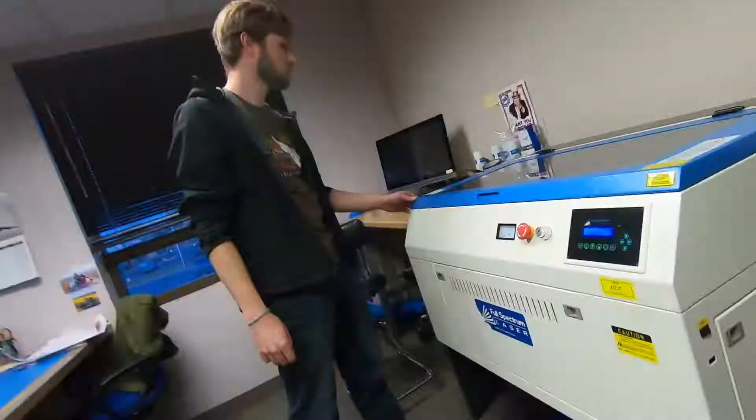Oh, is this the laser? Yep. So sweet. Most of its life is cutting foam for packaging stuff, but it also marks parts, cuts acrylic, marks metal. We can use it to engrave wood for personal projects.

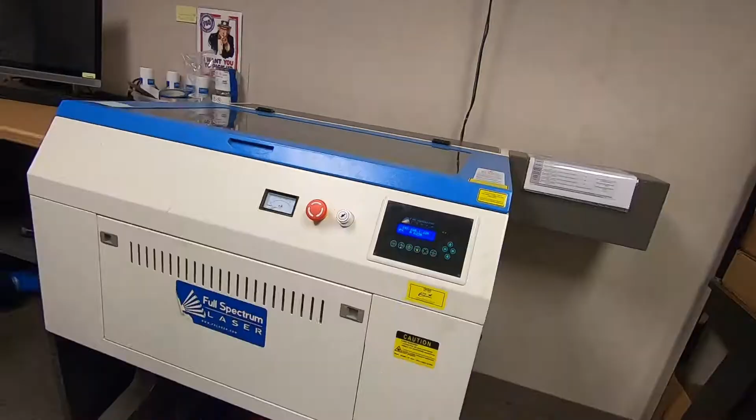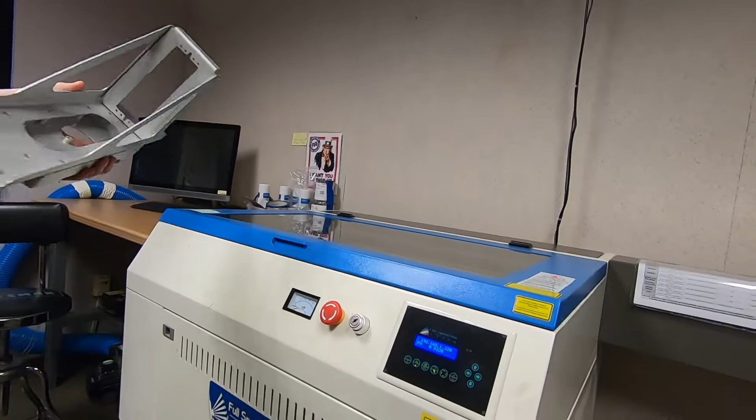So here's a mounting tray. This would hold a computer inside of an airplane, and so we laser the part number and stuff onto the side of the tray. Oh, I see. So use it for engraving too. And so like a product like this we make here from scratch. We start off with just sheet metal and go through the whole process and turn it into a part. So cool.

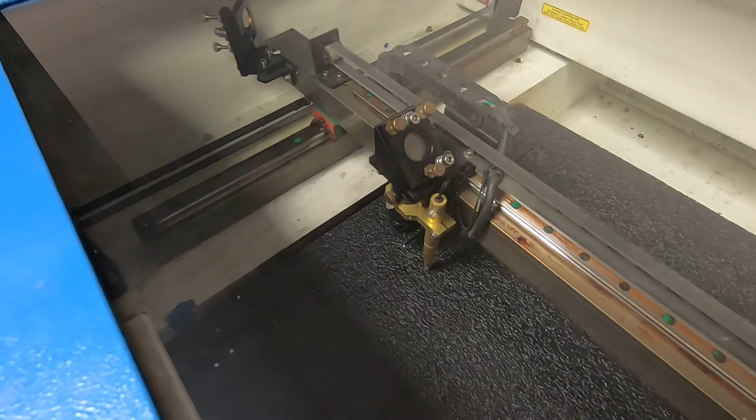Oh, it's exhausting into the room. Yeah, I was gonna say it's not even really making much smoke. Even bigger than that, yeah.

How many pins were those again? 66. 66, wow. I work with 4-pin connectors on PCBs. Oh, these are actually bigger pins, so less. Bigger pins, heavier gauge. So we do all that here.

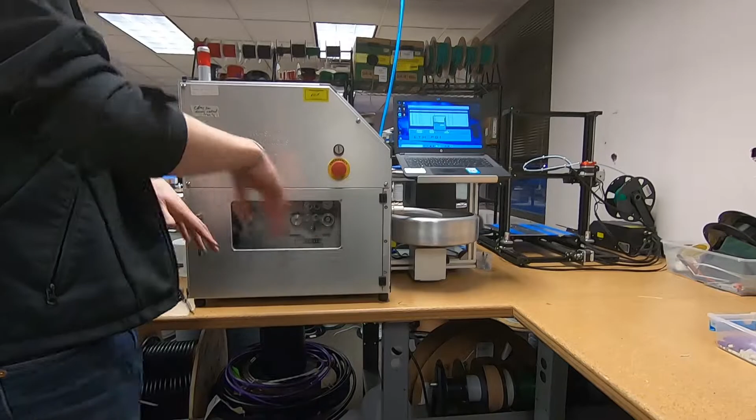So all the wires, before they go into here, you run through a laser wire marker, which marks them all. So we have all the different spools of wire, puts labels on them so you know which wire is which, and then they all go into here, get pinned up, crimped, shielded. There's shields on them, so they're all shielded wires. Yeah, so there's no EMI.

Oh, it's shielded for EMI. So you don't have to put any chokes on them or anything like that. Yep, no RF chokes or anything. And then the shields terminate and go to the base of the body of the connector. Ah, so when the body of the connector screws on, it grounds it, and that way your wires are protected throughout the whole run. Wow, no EMI. What an operation, dude, huh?

Yeah, and so some of this cable costs like $20, $30 per foot. Optimally, this is my desk. There's another rack. Yep, so this is another R&D rack. So these are like the panels we make from scratch. Is this guy? Beautiful work, all the circuit board and the soldering and everything in there.

So we put together the kits for the customer. This is for a very simple system. There's only a couple parts in this kit, but it has, these are antennas that they need. These are Wi-Fi antennas. This is a 3G, 4G antenna. This is an adapter plate for one of the boxes that goes in there. Some pigtails to break out difficult connectors into easier connectors. And then some other stuff that they're going to need for the install. Like I said, this is one of the simplest kits we sell.

Get this kit, nice job. I remember making kits. But it shows up all the stuff they need, all the components. They can just go off, take the foam out, go to the airplane, and have all the parts.

This is our little fabrication shop. This is where we actually make stuff, and it's kind of in process right now. We're doing a lot of rearranging, so there's stuff everywhere. But we have a little manual bender, metal brake, a metal shear, roller back there, paints and stuff, paint booth. The old one is out in the hangar.

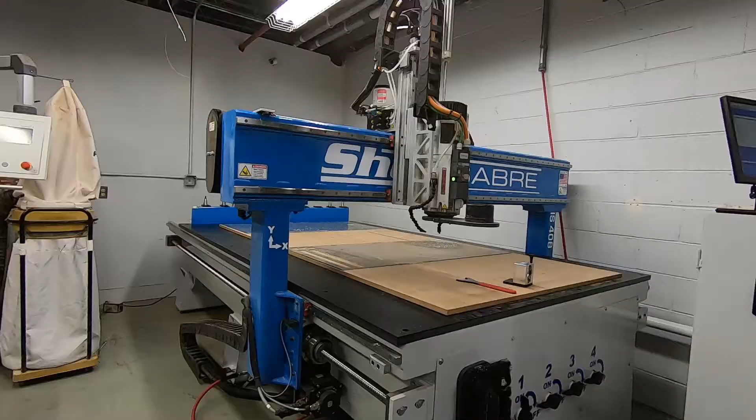This is what we use. We just got this machine like a week ago, and we're still trying to figure out everything about it. But the machine it's replacing, we'll show you out there is a tiny little plywood router, and it's not designed to cut metal, but we've been using it to cut metal for like 4 years. Yeah, and so this machine, which is designed for the purpose, is really, really cool.

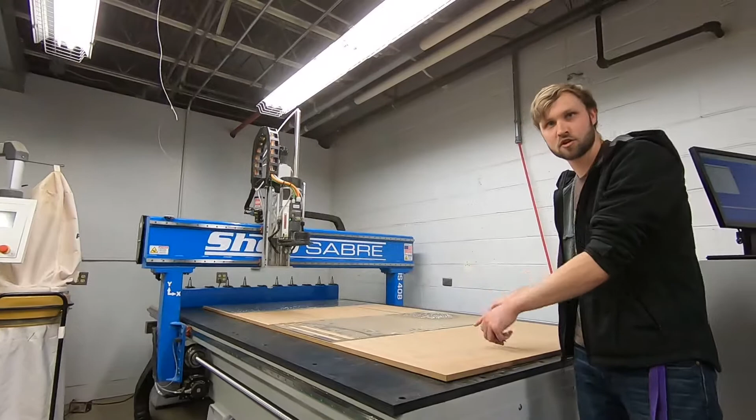Throw the vacuum on it. So before it gets too loud, this table has a big plenum on it. Yeah, there's a bunch of holes in the bottom, and you put this piece of wood on top. It's MDF, and the vacuum actually sucks air through the MDF. So you put your piece of metal on top, and it suctions the metal to the top of the wood just by sucking air through the wood.

Wow, you cannot move the piece. Solid. So when you put your hand on top of that, you can actually feel it sucking your hand. Wow, yeah, that's how strong the suction is. So I think the suction, go ahead and try and slide this metal around. Easy, right? Yeah, so keep trying. Oh, dude.

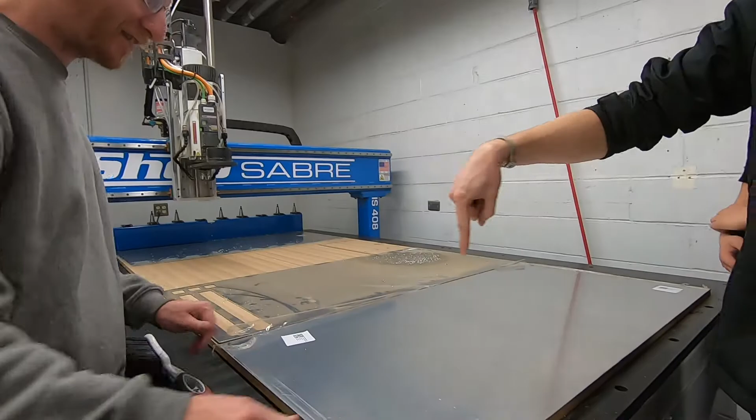You can lift it up, but you can't push it side to side. When it's cutting, that's what it's doing. Yeah, it's holding it steady. So it's really cool, it's as easy as just flipping a lever to lock everything down. No clamps or anything. Nope, exactly. Yeah, it's cool, hands free.

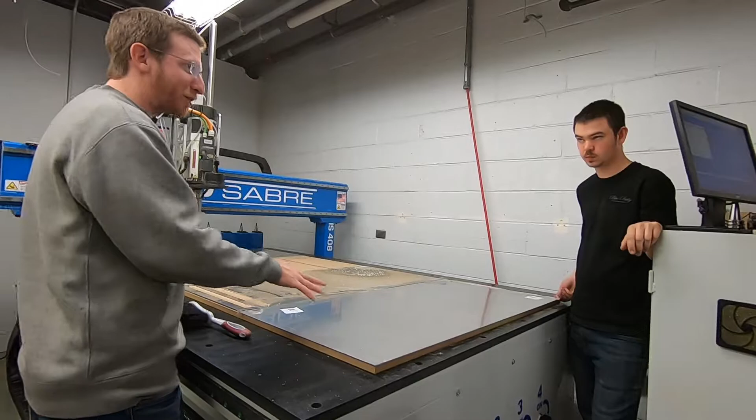So if you think about it, it's really the atmosphere doing all the work. Yeah, all you're doing on one side is creating less pressure. It's really the pressure on top that's pushing it down. So T0 pulls up nothing? T0 enter? T0 enter. Yeah.

That's the vacuum motor down there that actually sucks with the table. It's definitely a bit of a beast.

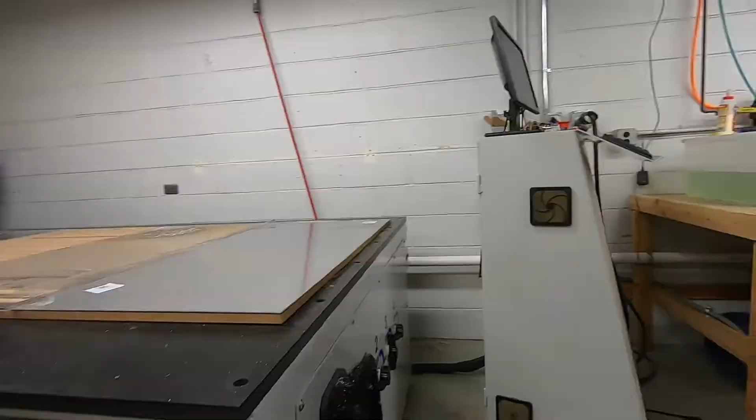G650. 1, 2, 3. Feeling so fly like a G6. Remember that from 10 years ago? 15 years ago? That's a G6.

What year? New, don't touch it. It still is, or may not still be, the most expensive private jet you can buy. For a couple years, yeah. Really? It's like $65 million.

65 million. Look at that leading edge, it looks huge. Oh my God, okay, well, look at a 747. Dude, that is completely ridiculous. Yeah, isn't it? I think it's a beautiful airplane, a beautiful piece of work there.

What's the speed on that? Don't know, it's fast, 700 miles an hour. They usually cap out at like Mach 0.9 or something. Insane. Yep, the range on this airplane is 7,000 miles. 7,000 mile range, holy smokes.

We kind of operate it, we do all the maintenance on it, an airplane, and we'll fly it no matter what. It's owned by a company that does marine salvage. So like when a cruise ship or a barge or a big ship goes down in the ocean, they're the company that gets called to go salvage the ship or cut it up, whatever. It's a function of a couple different variables, like what you're looking to do.

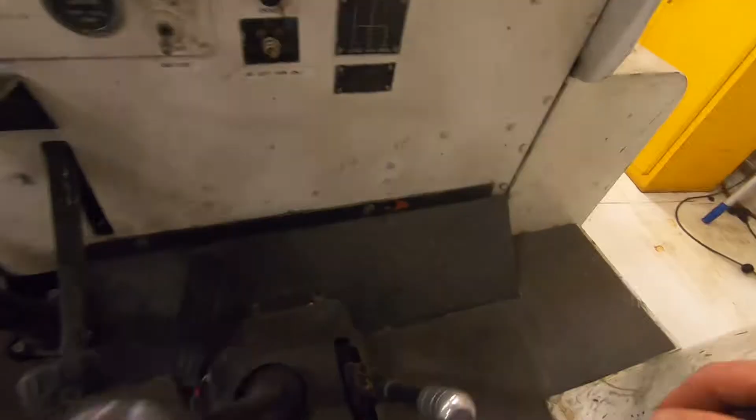That's a World War II tug? Yep, gas V8. That's awesome, all torque. But it's designed to be heavy and have traction, so you can push something that weighs a lot. Fun to drive. Yeah, I've seen these back in the day - they're nothing new, but it's a nice machine. Helps cut metal fast.

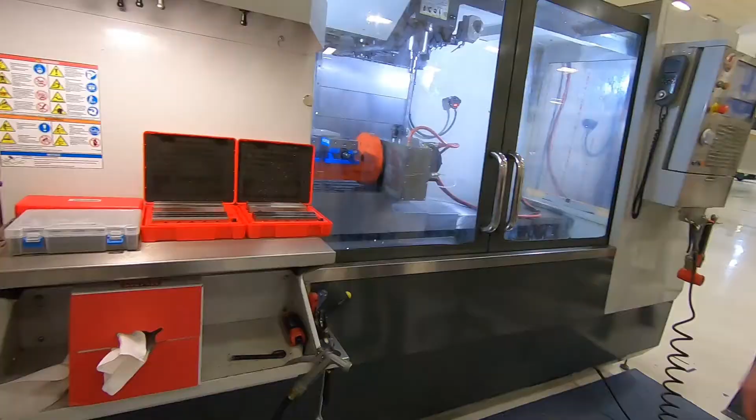This is the fun one. Well, they're both fun, but this is a really cool one. So this is like the newest addition, huh? So there's tools kept up there.

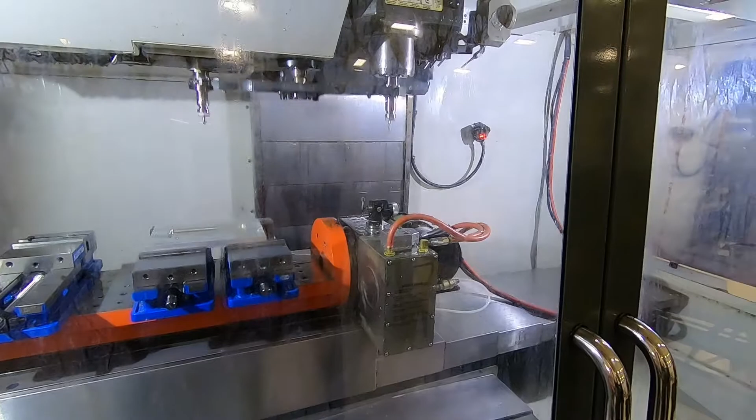Like a transformer, right? Freaking crazy. And then bring the table towards you guys.

So on the other machine, the head moves around and cuts stuff. On this one, the table with your part moves around, and the head just kind of goes up and down. Oh yeah, you got more mass. Yeah, you get more mass and more rigidity too.

This machine weighs what, 19,000 pounds. It's basically like there's a whole spine to the machine that keeps everything rigid, and it's cast iron, about 2 feet by 2 feet. If you look underneath there, the whole base and up around is cast. It's massive. So this table is your limiting size, and we have this orange thing on here.

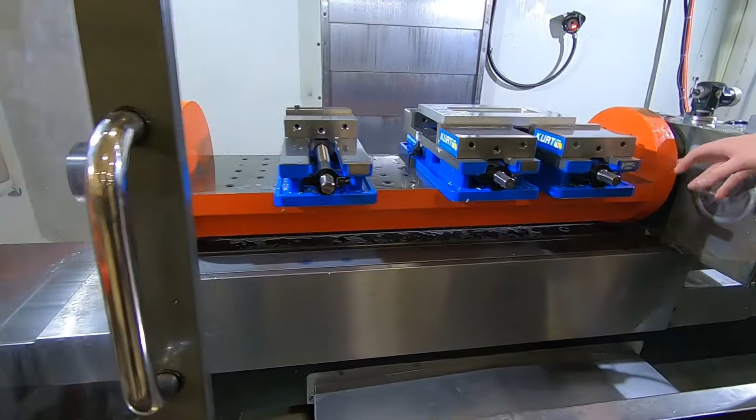This other motor is a 4th axis, so it can tilt. That's a brake, an air brake. So you can tilt it, and you can rip angles on it - crazy stuff, you can do more complex milling.

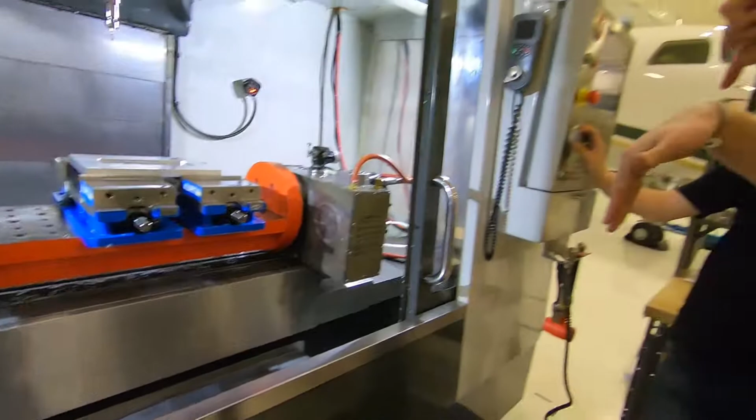So you have your 3 axis - your 2 axis XY movement, your Z for your head, and then you also have A axis, which is twisting. You can then add B axis, which would be like rotating too, and then you can have full 5 axis. You can reach 5 out of 6 sides of a part that way, which is insane.

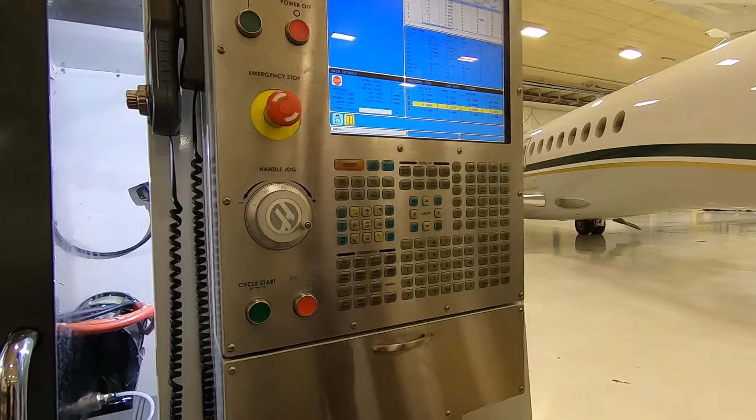And everything's up there on the screen, huh? Yep, so that's how you control it. We write the code on a computer for a part. So engineering will design a part, and then you write the code for it on a computer, come out here with a USB stick, stick it in, and then there's some machinist operations that you have to do, and you can cut the part. That's so cool, dude.

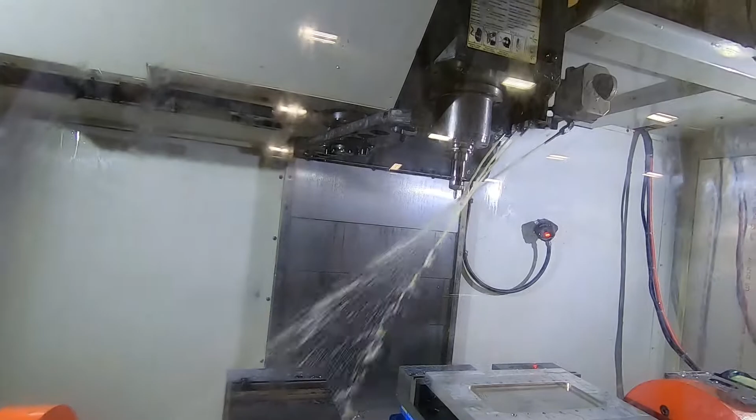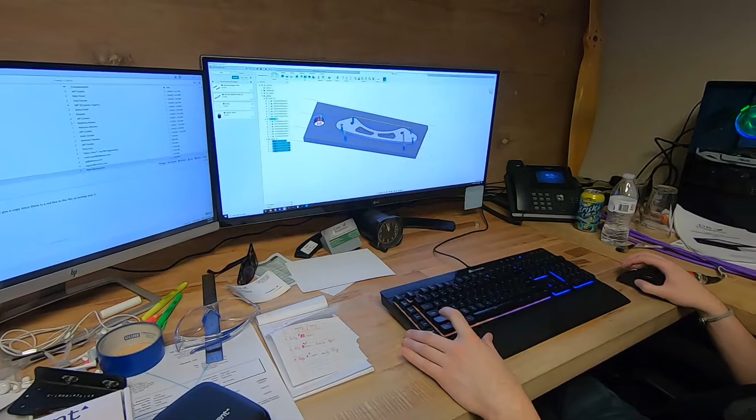Yep, so there's your part - there's a 3D model of what we wanted to make. And you design the fixture for it, so this is that metal plate out there that we just put in the machine. So you design that and you tell it where it is, and here's the code that we made to make the plate there. And then you write the code to actually cut the part out.

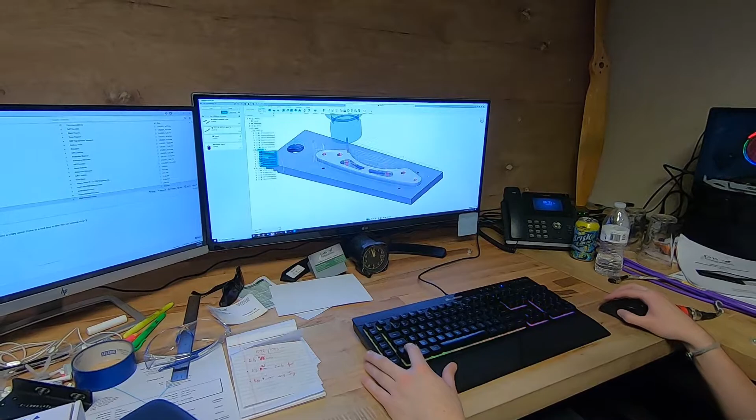So you start off with that big plate, and these blue lines are the tool path, so that's where it's going to be cutting. It mills all of the material away down to the part we want left, cuts these interior holes and everything, and then it chamfers the edge at the very end, and turns it all to chips. So you create the code for this, and then you can export that code.

I might be able to see better over here. Sometimes from my hand. It's hard to see either way.

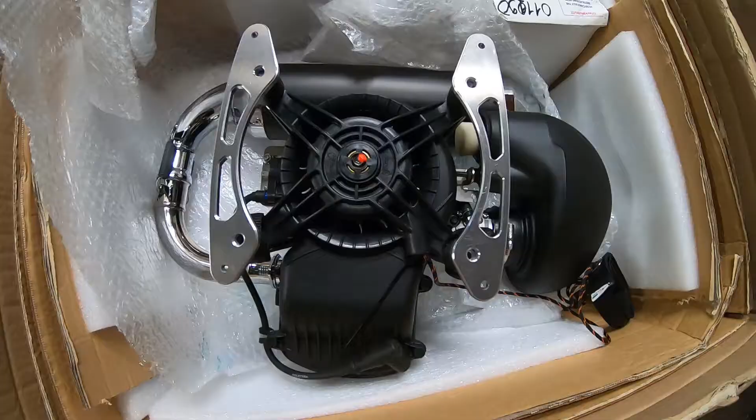Oh, dang it. Damn GoPro battery died again - just before we started having even more fun.

Anyways, I wanted to thank Eddie, Branden, and Tyler for helping me make these beautiful pieces of jewelry for this engine here.

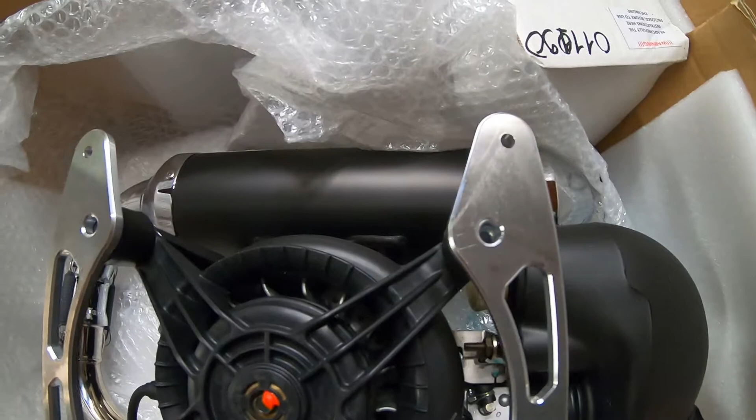Beautiful pieces of jewelry, man. I'm telling you, I sat and looked at them for hours after I got home. Hey, man, I couldn't have done it without you guys. Thanks for letting me into your shop there and treating me just like family.